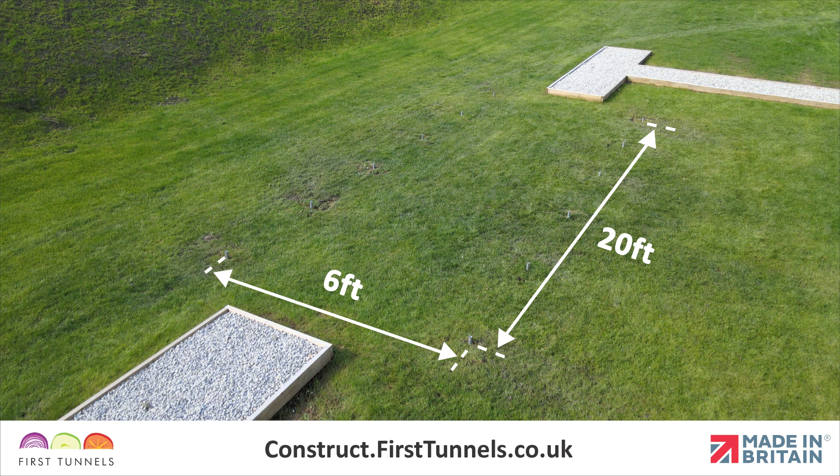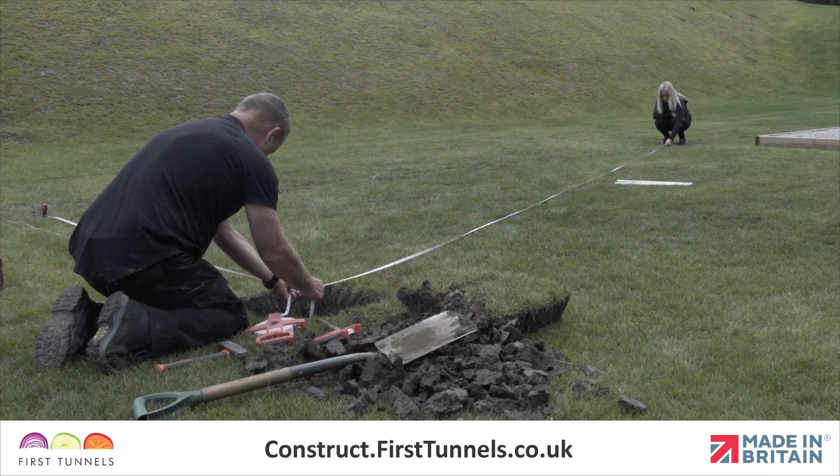Setting the foundations is an essential part of constructing your polytunnel. Taking your time to set your polytunnel foundations correctly will ultimately result in a more robust polytunnel that performs well and looks good. Here are the parts you'll need.

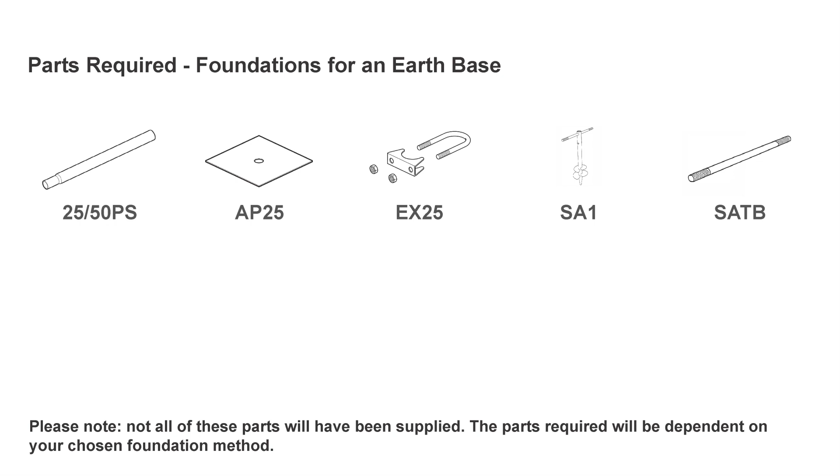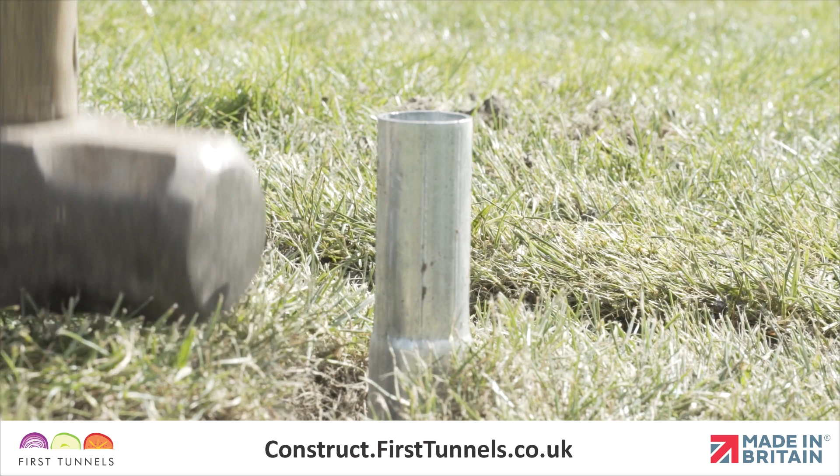All of your polytunnel foundations should be in line, evenly spaced, and consistent in height. To get started, we're going to position the 4 corner foundations. If you are using anchor plates or concrete, the swaged end of the foundation tube should be out of the ground when set. At this stage, we are temporarily positioning the foundations to make sure we have the right measurements, so only push them into the ground enough to steady them. Take all measurements from the tube centers.

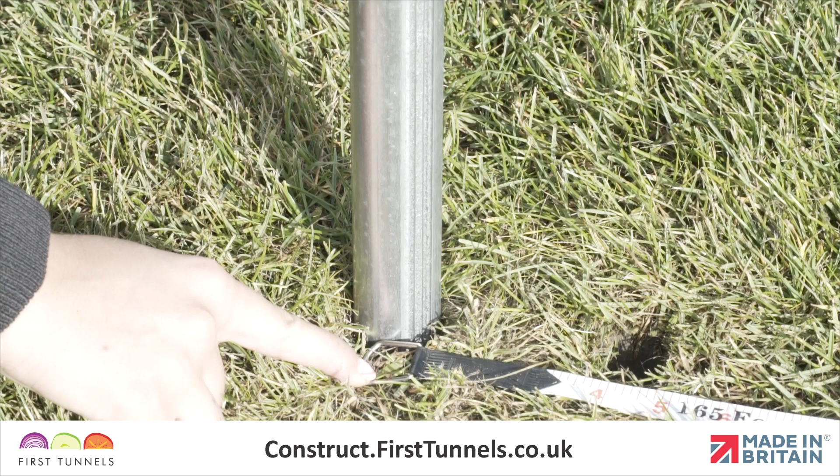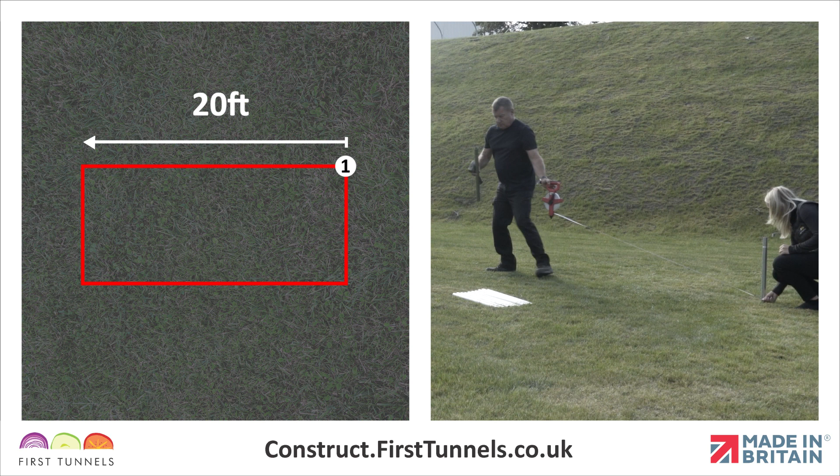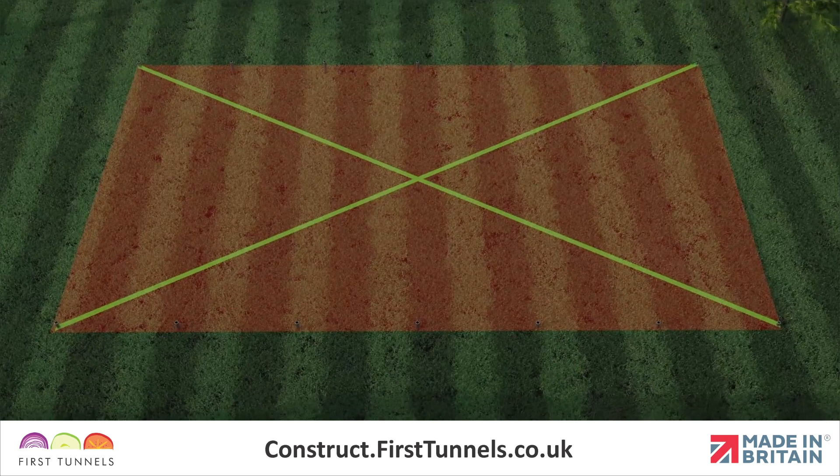Choose a corner and position the first foundation. From this corner, measure down the length of your polytunnel, in this instance 20 feet, and position the second foundation where your polytunnel ends. It is essential that your foundations are set square. This can be achieved by ensuring that both diagonal measurements from corner to corner are equal. This measurement is different for different sizes of polytunnel. We have listed the diagonal measurements in your construction booklet.

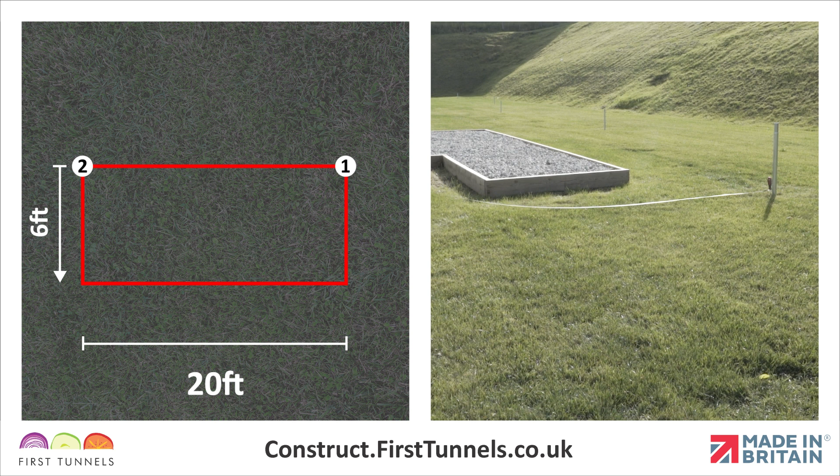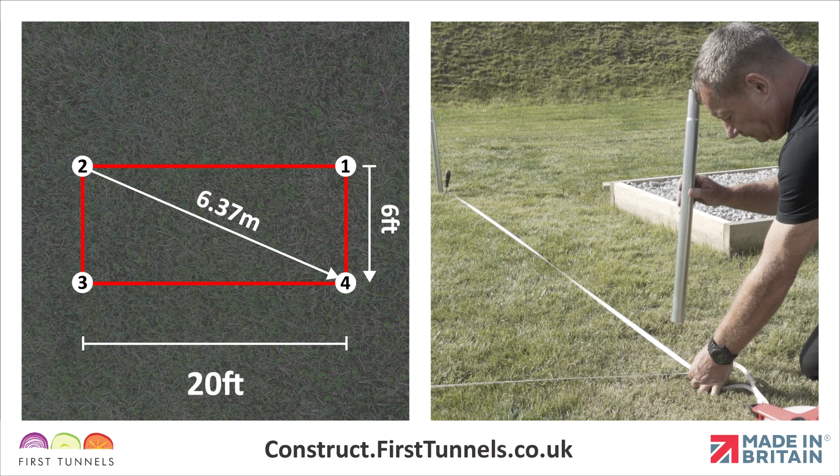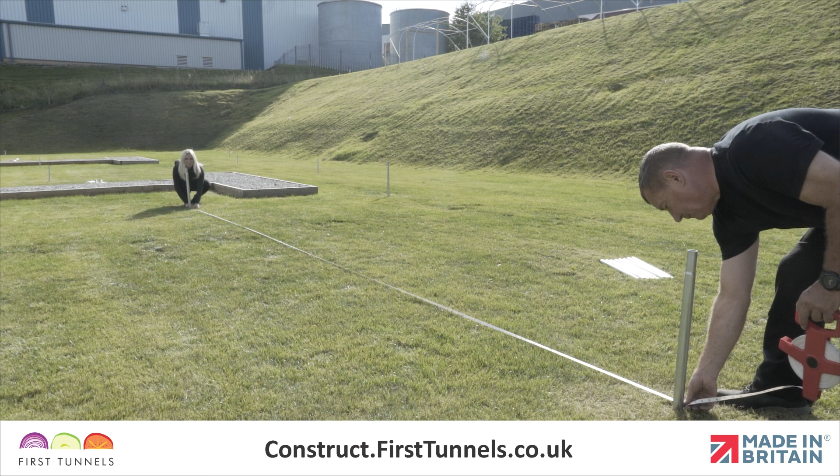Using 2 tape measures in tandem, measure 6 feet across the width from the second corner and diagonally from the first corner to position the third corner foundation. Repeat this procedure to position the final corner foundation. Finally, double check that the measurement between number 3 and 4 corners is correct for your length of polytunnel, in this instance 20 feet.

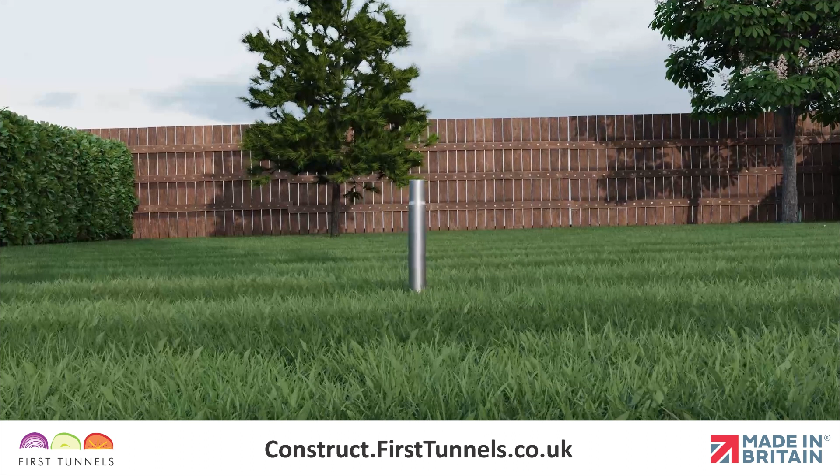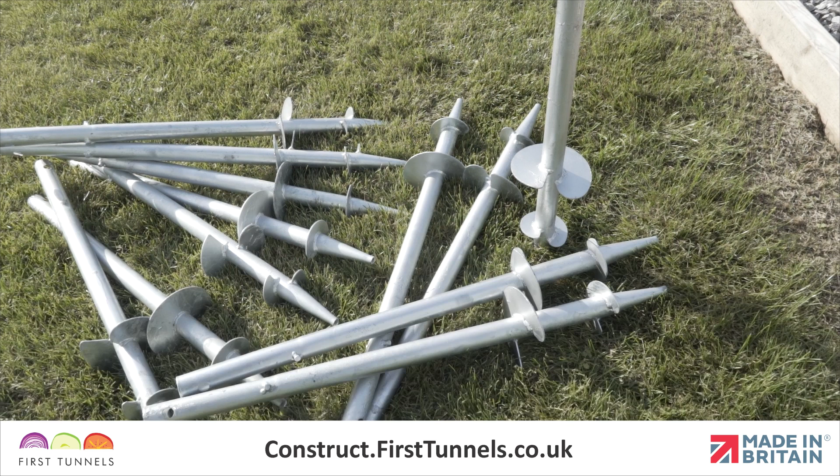Now your corner foundations are in position and square, you should now check that the site is level. A slope along the polytunnel's length is not an issue. However, if the site slopes across the width, then the foundations on the lower side will need raising out of the ground until they are level with the other side. This is to ensure that the hoops are vertical. We suggest that the foundations are raised no more than 15 centimeters, as you require enough foundation to be secured into the ground. Screw anchors will not be suitable if they require to protrude more than 15 centimeters.

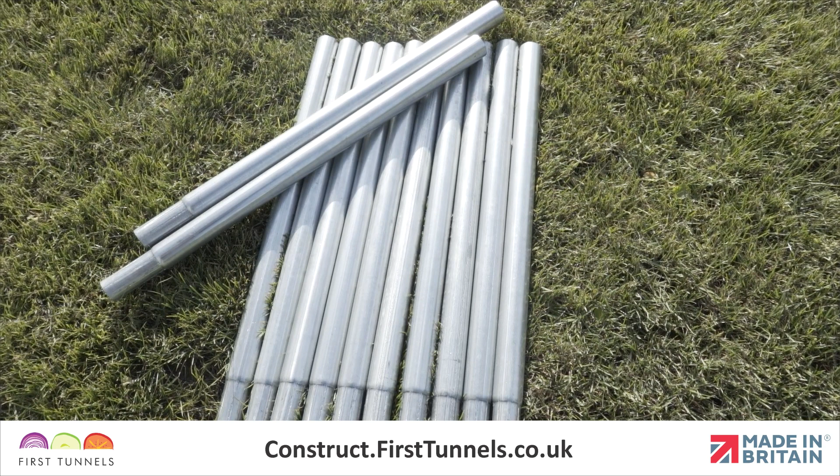Checking the degree of the slope can be achieved by running a taut string line from the base of a corner foundation across the width. Delicately holding a spirit level on the string line or using a line level can determine the slope. If a slope exists, you must start by fitting the foundations on the side that is the highest first.

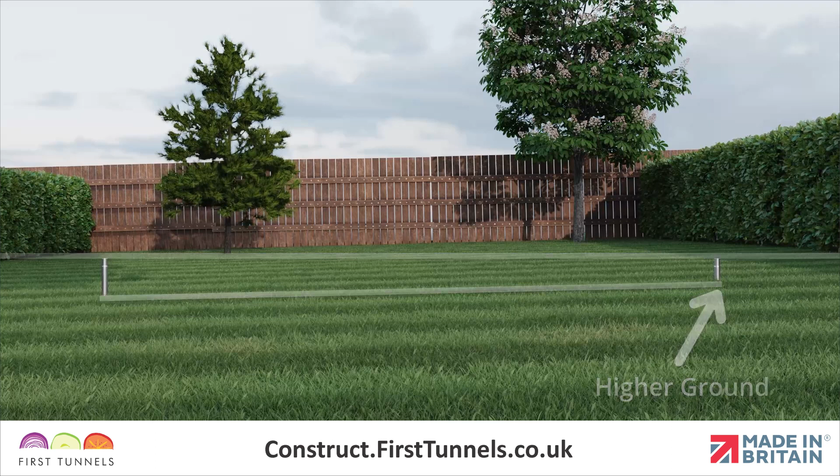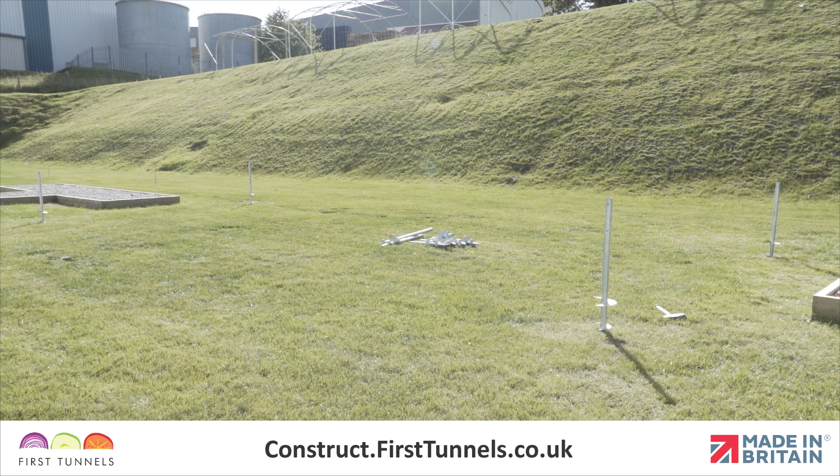We will now show you how to secure the foundations into the ground. If you are using anchor plates or concrete, you will be required to measure around the foundation tube and excavate a 40 cm square by 45 cm deep hole. This means you'll be required to remeasure the position of the foundation tubes using the methods demonstrated earlier. If using screw anchors or simply knocking the foundations into the ground, the 2 corners on the higher side can be screwed or knocked into the ground.

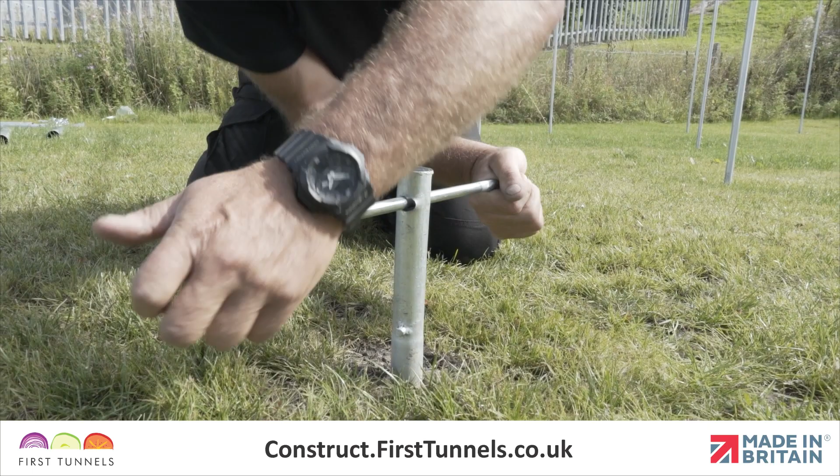For screw anchors, simply slot the turning bar through the tube and start turning clockwise until the bar stop is at ground level. If the site is level, then all 4 corners can be fixed. If the site is not level, we demonstrate how to determine the height of the foundations on the lower side later in this video.

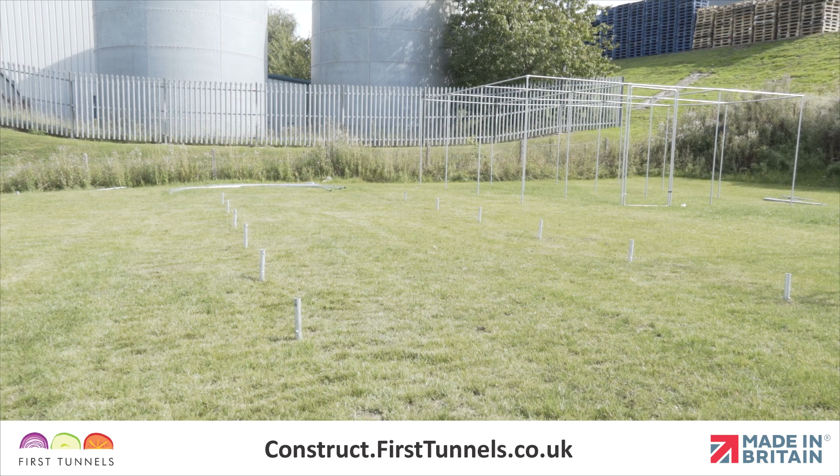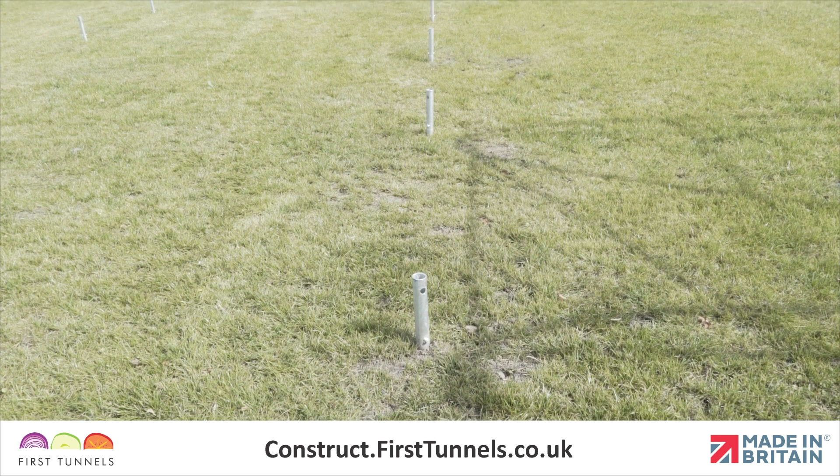If you have found that your ground has high stone or rubble content, you'll be required to excavate a hole and secure your screw anchors with concrete. Reposition the foundation tubes using the method demonstrated earlier. The base of the hole can be used to hold the foundation tube in place.

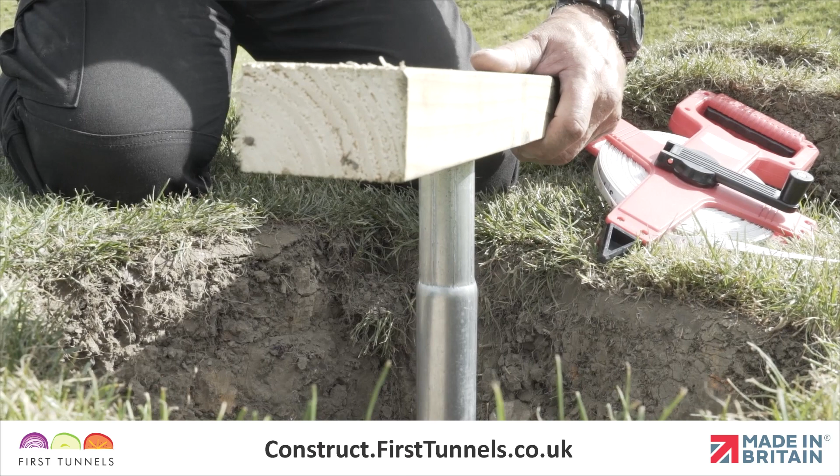Protecting the swaged end with a piece of timber, knock the foundation tube into the base of the hole. The base of the swage should be set at ground level. Use a piece of timber to lay over the hole as a guide.

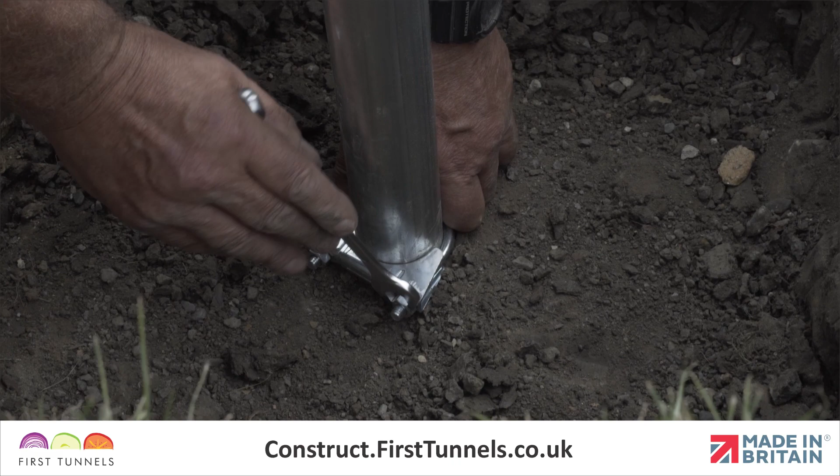Now we will show you how to secure foundations using anchor plates. Secure an exhaust clamp to the bottom of the foundation tube using a 13mm spanner. Slide an anchor plate down the foundation tube to meet the clamp and then secure another exhaust clamp on top. Now you can backfill the hole, packing the soil as you go.

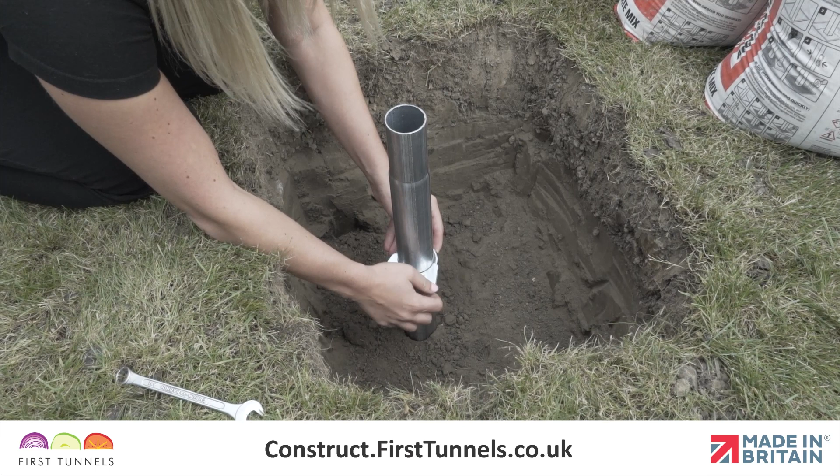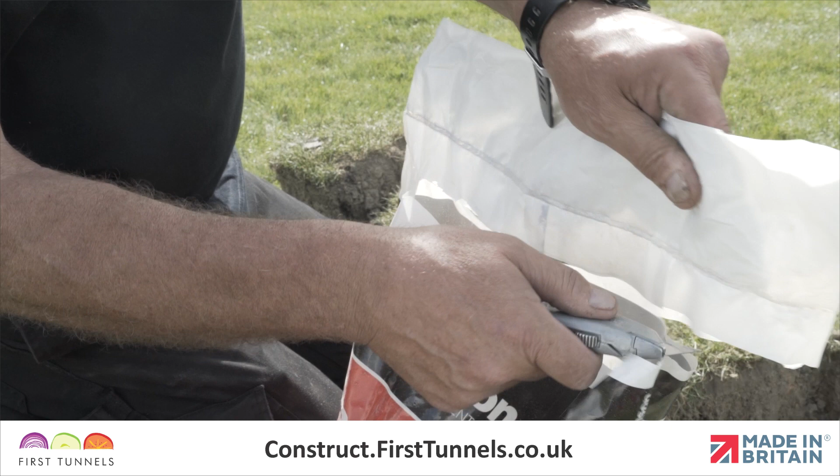Now we're going to demonstrate securing the polytunnel foundations using concrete. Secure an exhaust clamp approximately 2/3 down the tube. The clamp prevents the unlikely instance of the tube sliding out of the concrete block. We suggest using concrete that is 1 part cement and 5 part aggregate. We also recommend postcrete. This ready-made mix is supplied in 20kg bags and you simply add water. Approximately 2 bags per hole will be required.

We have now shown you how to secure the first foundation in position using anchor plates or concrete. We will now proceed to secure the 3 remaining corner foundations. For the second corner, use 2 tapes in tandem to reposition the foundation and secure using anchor plates or concrete. We will now secure the third corner.

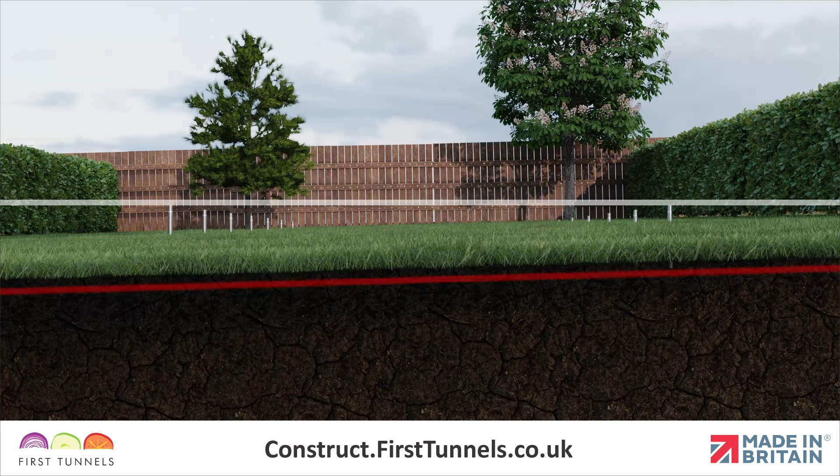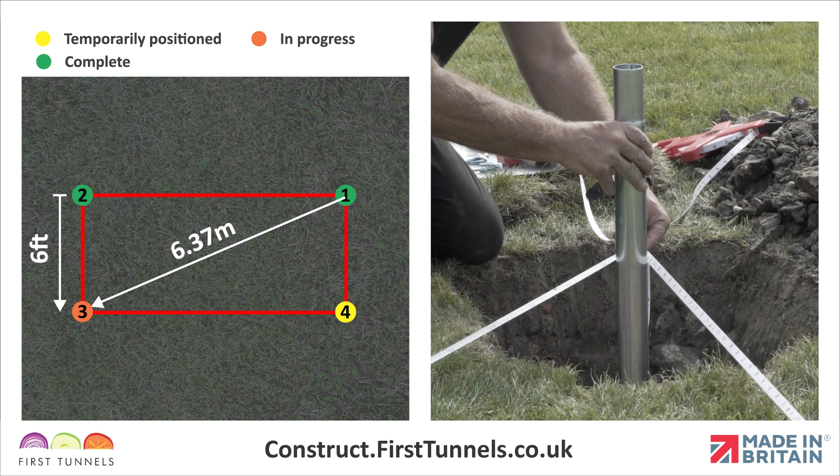The foundations on the opposite side of your polytunnel must be sat level across the width. This may require setting the foundations higher out of the ground. If using anchor plates or concrete, excavate a hole and reposition the third corner foundation using the methods described earlier.

To ensure the foundation tube is sat level across the 6-foot width, tie a string line onto the second foundation tube close to the top. Adjust the height of the foundation tube to the correct level across the width. You may be required to return back some of the hole spoil to accommodate this. Once the third foundation is the correct height and position, secure it into the ground using anchor plates or concrete.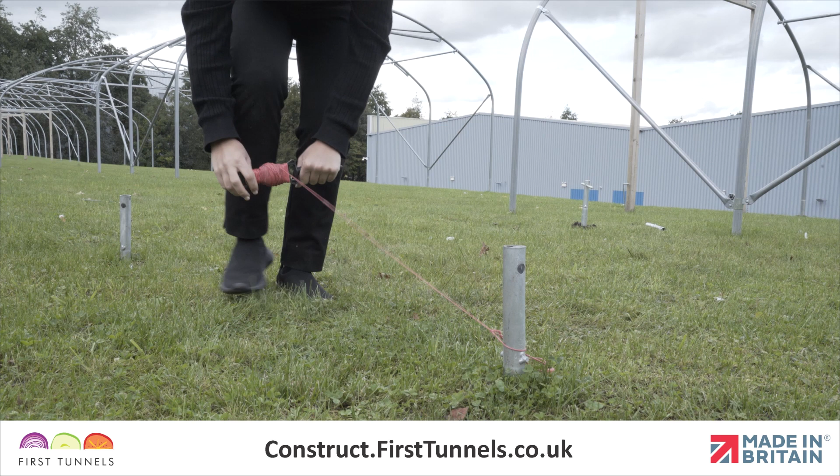If your site is not level and you are using screw anchors, tie the string line just above the bar stop. Pull the string line across the width and screw the fourth corner screw anchor into the ground until both bar stops are level.

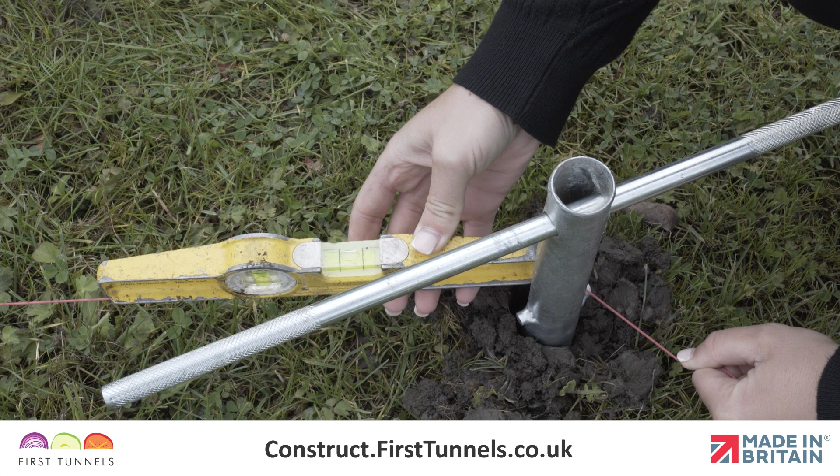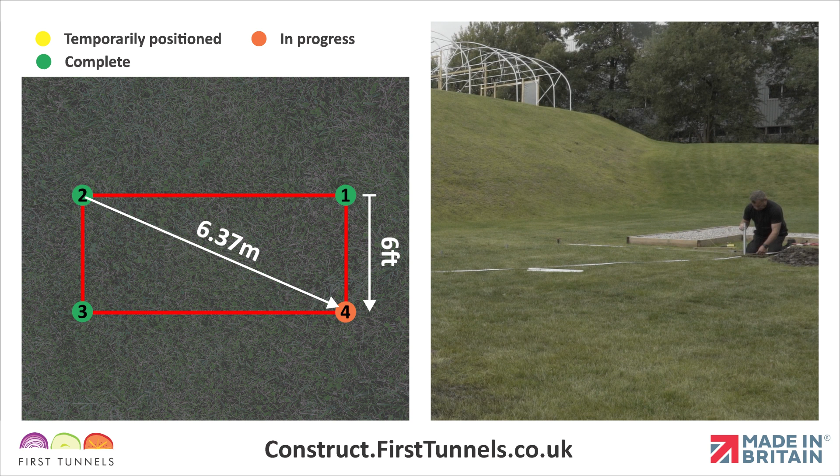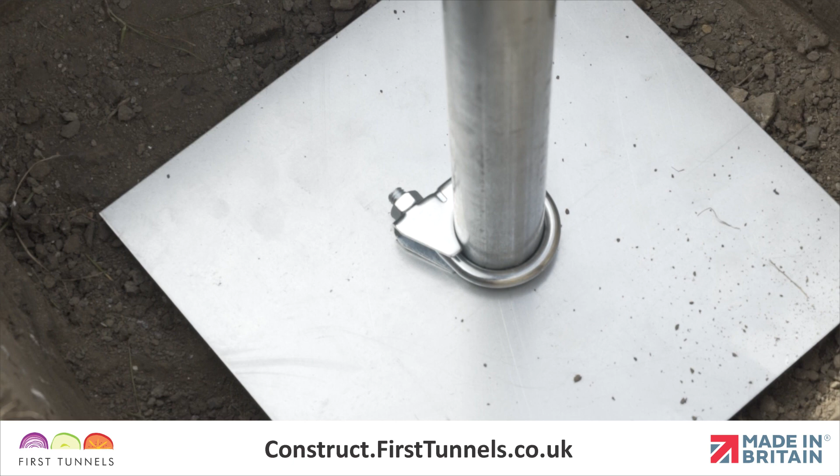We will now reposition and secure the final corner foundation. If using anchor plates or concrete, excavate a hole and reposition the fourth corner foundation using the methods described earlier. Tie a string line from the first corner foundation and pull it taut across the 6-foot width to ensure the fourth foundation is level with the first foundation and secure into the ground using anchor plates or concrete.

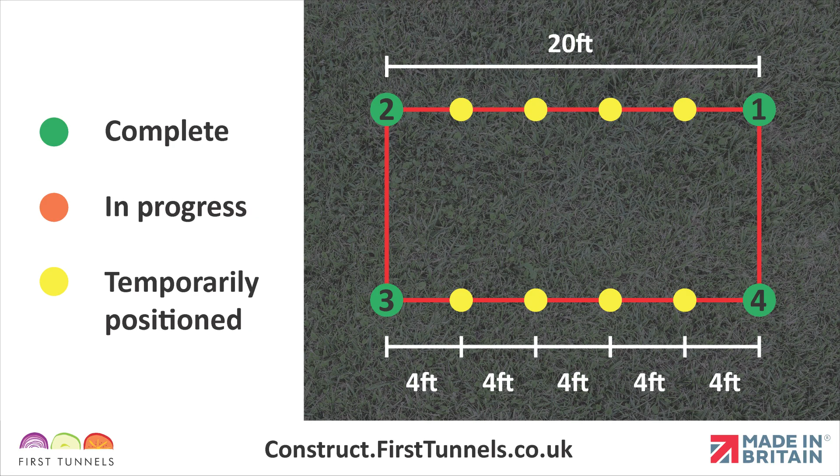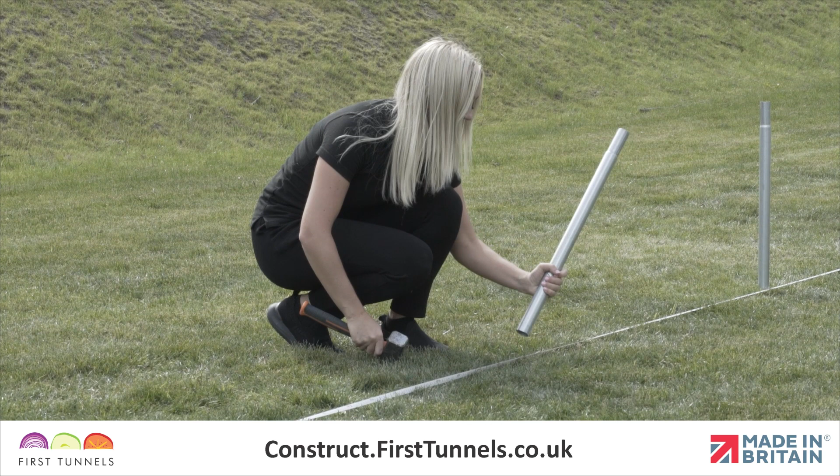We have now positioned and secured all 4 corner foundations. You can now install the intermediate foundations. Use a measuring tape to position intermediate foundations at 4-foot spacings. If using anchor plates or concrete, excavate a 40cm square by 45cm deep hole for each foundation.

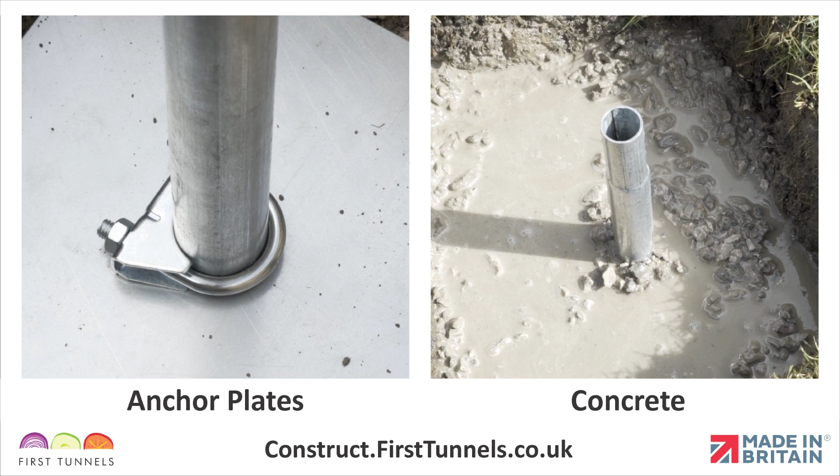Use a taut string line between the 2 corner foundations to ensure the intermediate foundations are consistent in height and in line. Reposition the intermediate foundations in the hole and secure using anchor plates or concrete. If you are using screw anchors, position them and screw them into the ground using the same method as earlier, ensuring that they are level. Now we are ready to repeat on the opposite side.